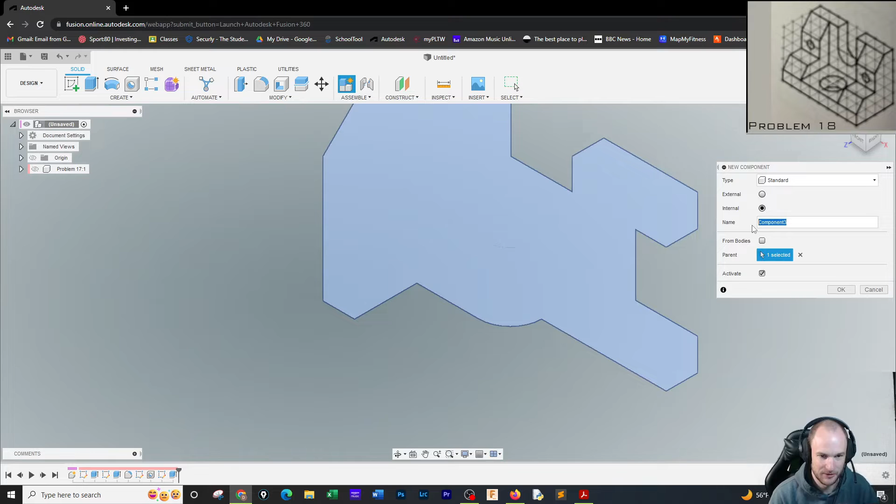Here we go. Number 18, the last of these block problems. I know you're excited because I'm excited too. So, new component, problem 18. And we're going to click up here. I'm going to click the front face. And guess what? I am making a rectangle that is 8 by 5, as I've done for almost all 18 of these problems.

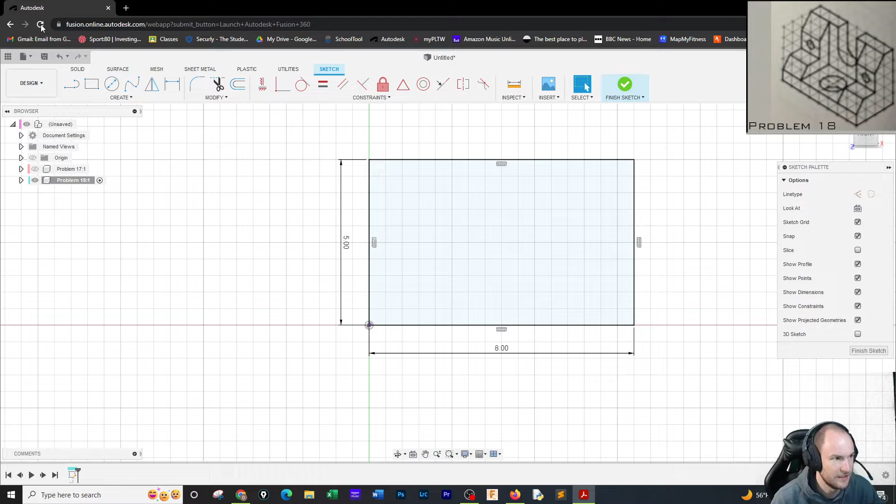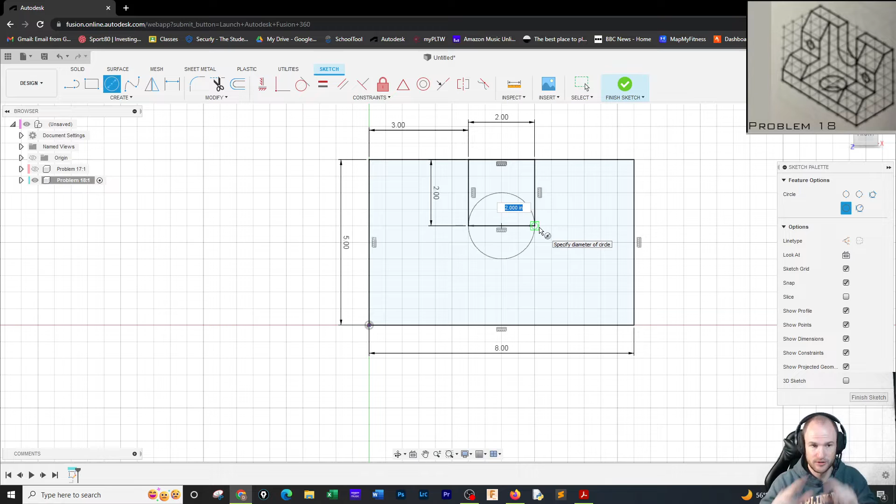I'm just looking over the drawing. Gotta do some kind of box in here that's a 2 by 2 box. So the box is 2 by 2. Those are the dimensions I'm throwing on there. And it's going to be 3 from either side. It is centered, so you could do 3 on the left or 3 on the right. There we go, 3 on the left. And then to get that rounded bit, we're going to draw a circle right off of that center point. You know it's a center because it's got that triangle going. And draw the circle there.

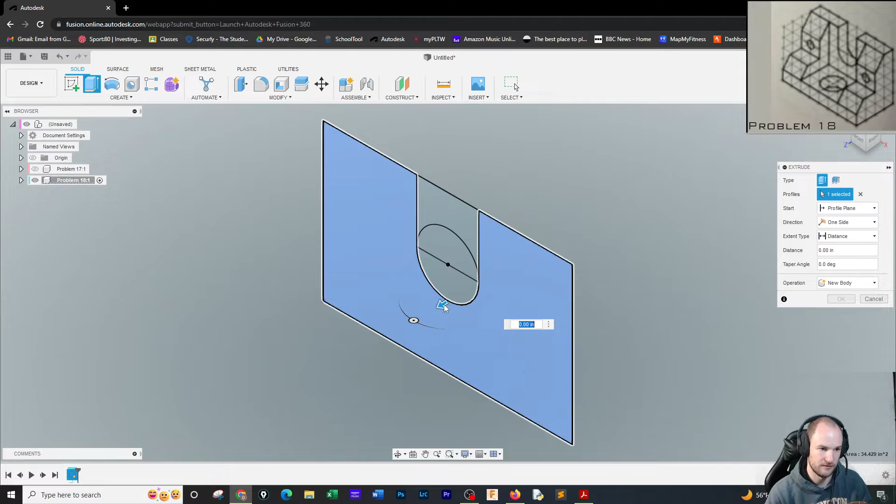And that's great. Can't hit anything else from this view, so I'm going to go to the little house up in the corner, turn that off, and we are going to extrude this back -4. You could extrude it forward -4 too, it's the same either way to me. If I was machining this, that makes a difference, but we're not, so don't have to worry too much about that.

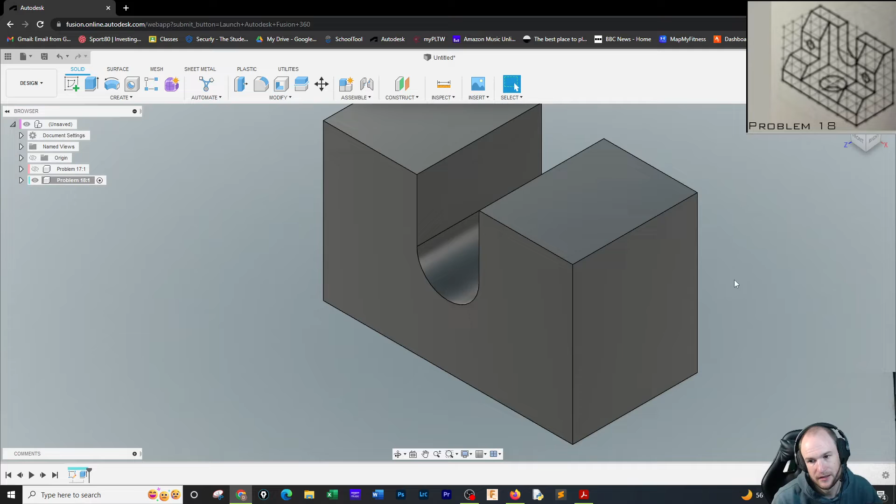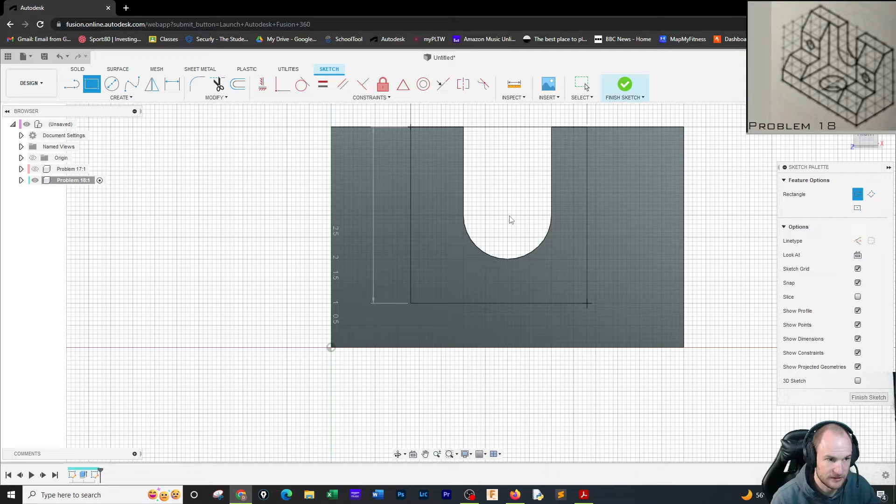All right, now we got a lot of stuff to cut out. We got 2 sets of holes to put in, and then a cutout on the side and the front. So I'm going to do the cutout on the front first, because I can do that with 2 of the holes, try to save myself some steps. So I'm going to draw right here a box, and this box is 4 by 4. So it is a square. As you can see, the dimensions 4 by 4, and it is going to be 2 from either the left or the right side. You can decide yourself.

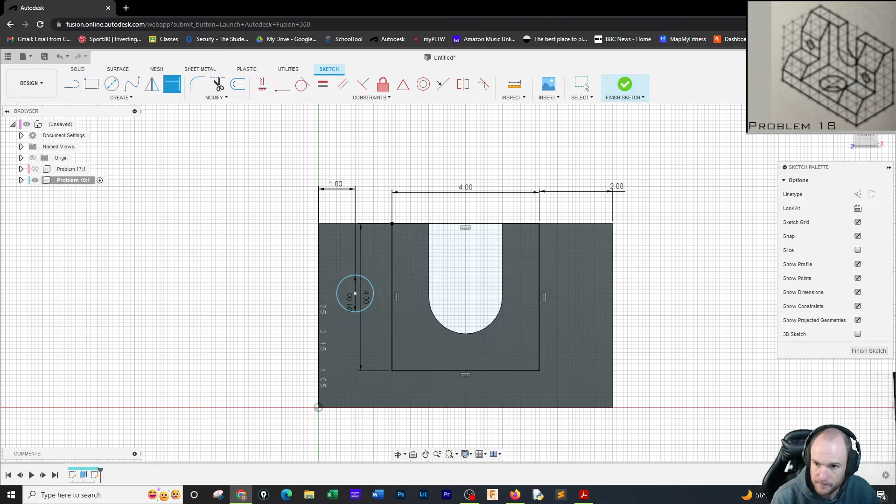And then I need 2 holes. I need a hole on this side. I'm just going to put it there. And these holes look tiny. They got to be 1. Like they are centered, 1 inch in. Looks like they're 1 box. So I'm going to say they're 1. Even that looks big though. And it is 1 inch in. And from the, let's see, 1, 2, 3. Is that right? I believe it is. So 1, 2, 3 from the bottom.

The diagonal cut we're going to have to do is going to be tricky, because it's kind of a field cut. It's not a definite dimension. But these are, so I can actually line this up. Approximately 1 inch hole. Could be a 0.75 hole. I'm having doubts. 3, and then 1 from the side. And I'm going to have to share sketch this later, but I'm not worried about that right now. Just wanted to get them all in there.

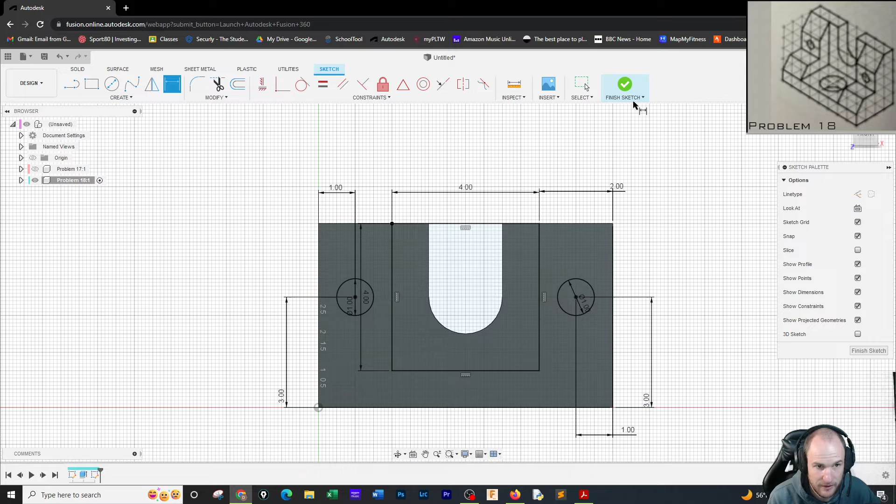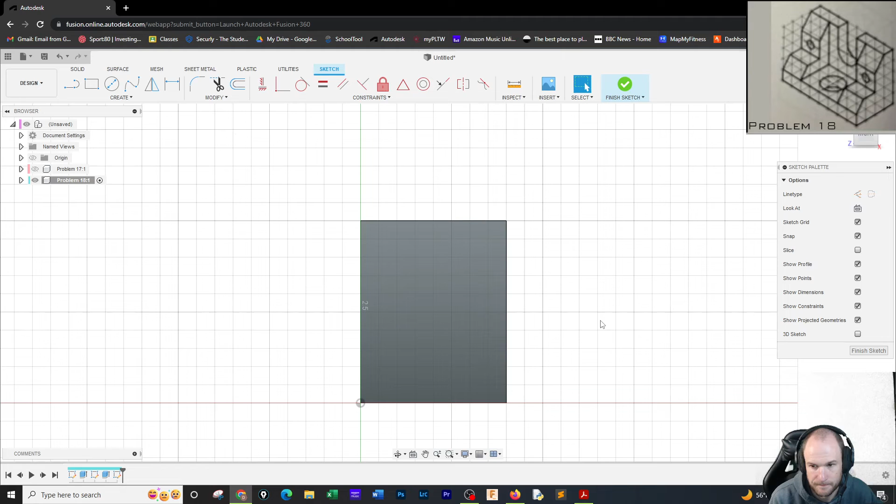And I'm going to do the definite thing first. I'm going to go in here, and this goes in 3. So that goes in -3. That's the definite. That's easy. All right. I'm going to make a sketch on this side face right here. And this is where it's kind of hard, because we got to make some kind of shape that looks like this, and we got to close it off, but we got to get all the dimensions right too.

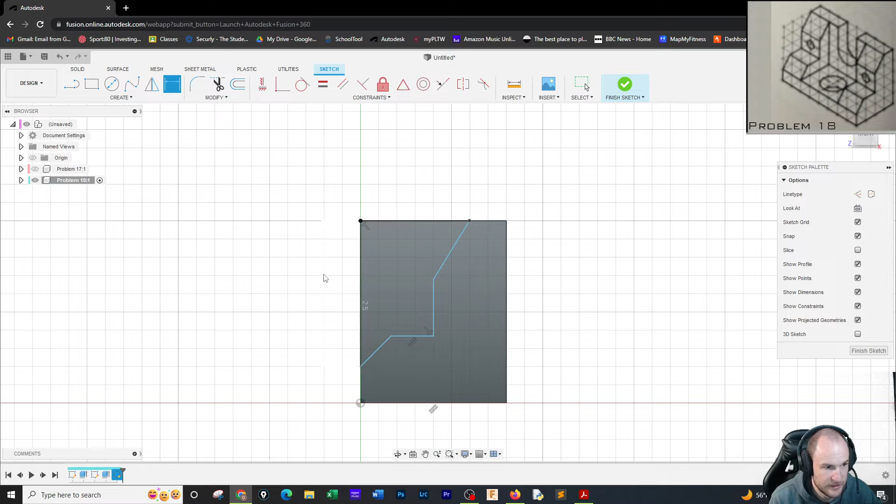Some of the dimensions are easy, like this one's a definite. That's 4. That's definite, rock solid. And this one's going to be 3. Those two dimensions are pretty much rock solid. I know exactly where they are. The problem is there's not a real definitive of what these angles are or how far over these things are. Like from here to here, if I was to dimension this, it's hard to tell. I'm gonna skip that because I've got some definites I'm looking at.

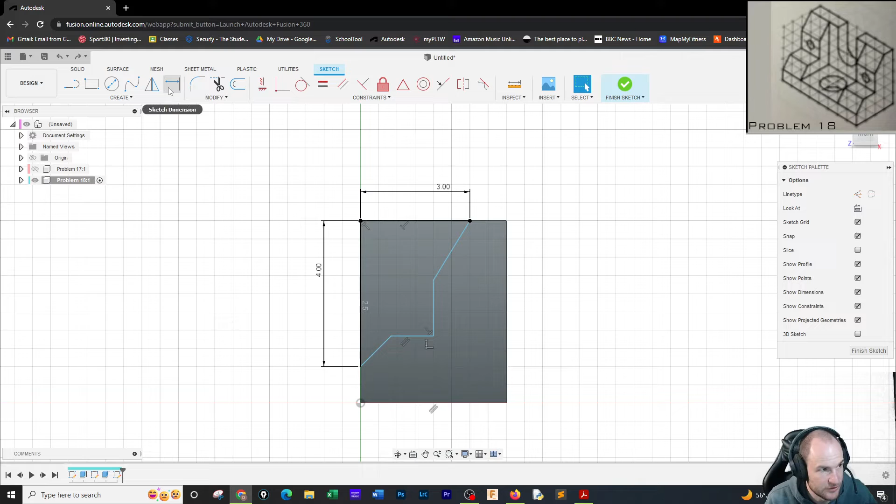This spot is definitely at 2. So like this is a definite. This is a 2. From there's 2. So that's a definite. That's good. And then I guess we're gonna have to go off of that. This goes up just shy of 2. It's not quite a 2, it's just shy of 2. So I'm gonna say this goes up 1.75.

And then this one right here is just over 1. So I'm going to call this one 1.25. And that's the closest we can kind of get with a drawing like this. It's got to be some level of estimation. But we're gonna go with that. So take a second, get those dimensions in, and then I'll hit finish sketch.

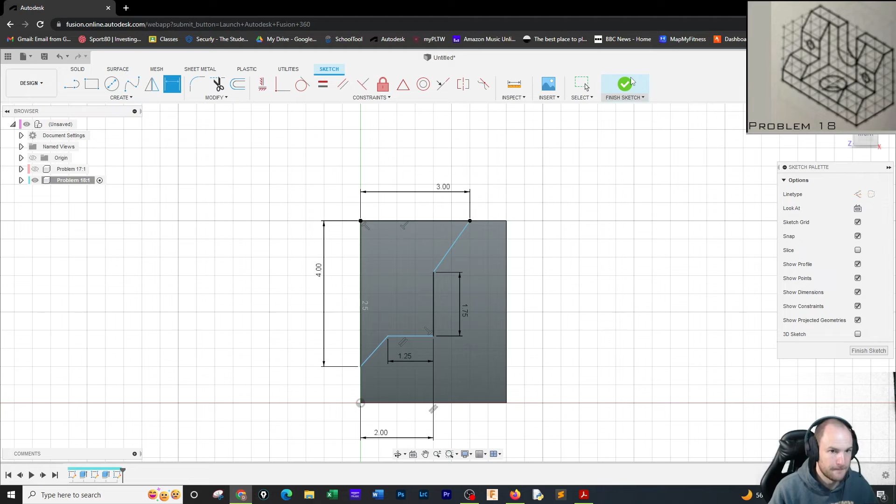I'm going to extrude this through. If I finish sketch, I'm going to extrude it through. It's going to give me kind of a look at it to see how it looks. It looks pretty good. If I go back over here and I open up my second sketch, this one, I can now take these 2 holes, cut them through and see if this looks good. I'm just going to grab those 2 holes and bring them through.

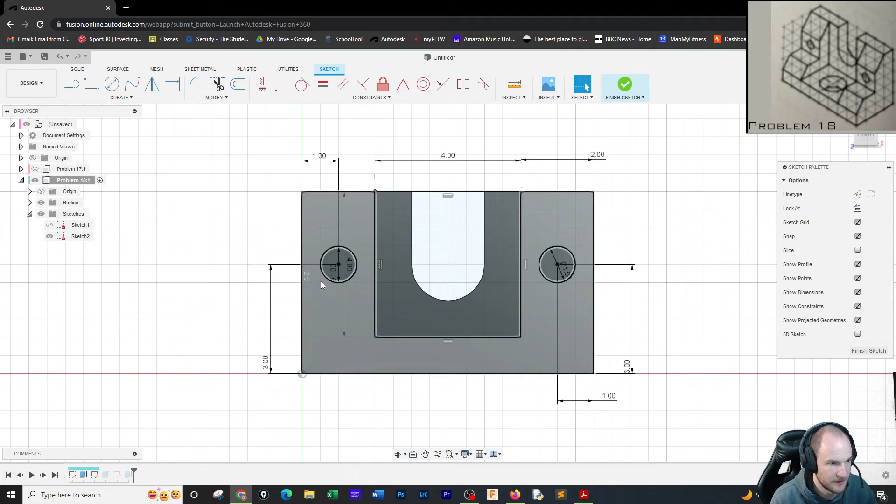And those holes, they look too big. So I'm going to open that sketch back up. And I'm going to change these holes. It's hard to tell, but I'm going to change them to 0.75. And I think that's going to be a more appropriate size. We're going to hit finish sketch. And now I'm going to extrude them through and see how this compares. And that looks much more like it does in the drawing. So I changed it to 0.75.

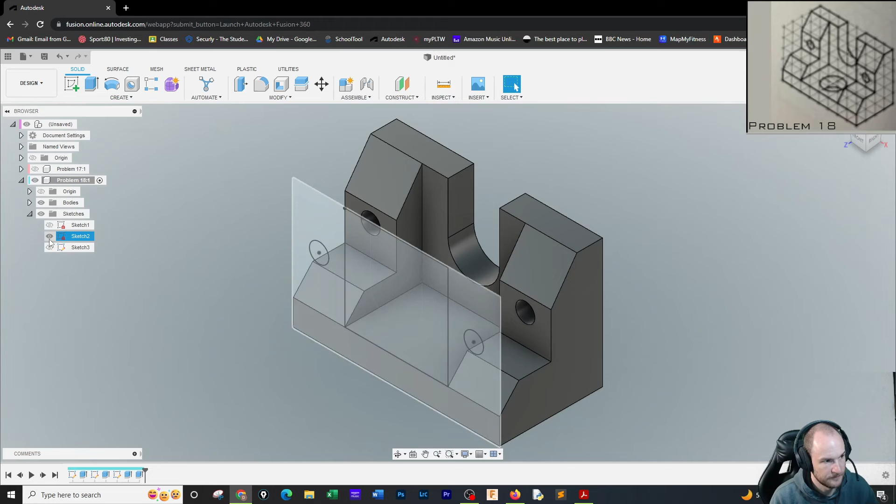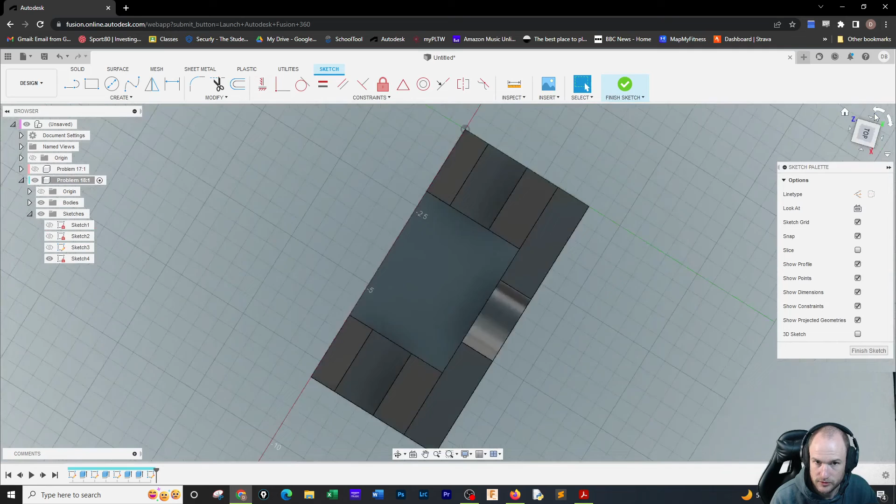I'm going to turn the sketch off. That's looking pretty correct now. I'd say this is all good. And then I just got to put a hole in the top. We're going to spin it. 1, 2. Turn this on. And looking at the drawing, we can use a point or a circle. I'm just going to use a circle. The circle looks like it is 2 in diameter. So I'll make the diameter of the circle 2.

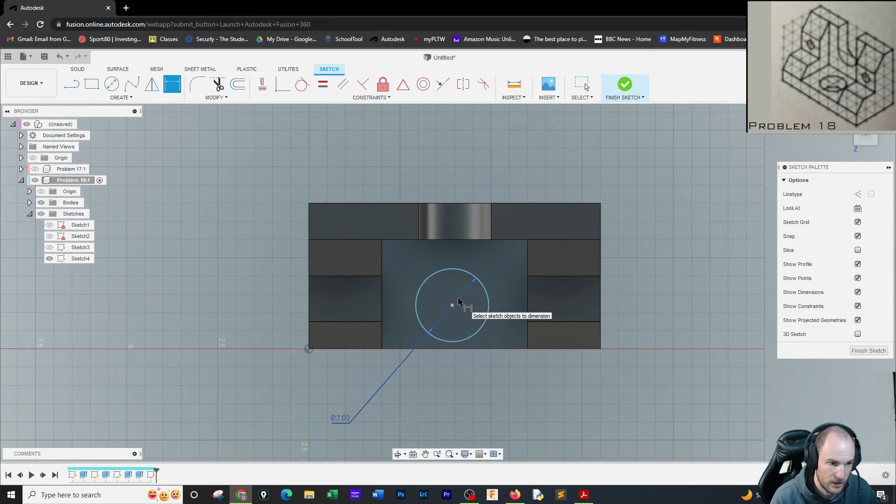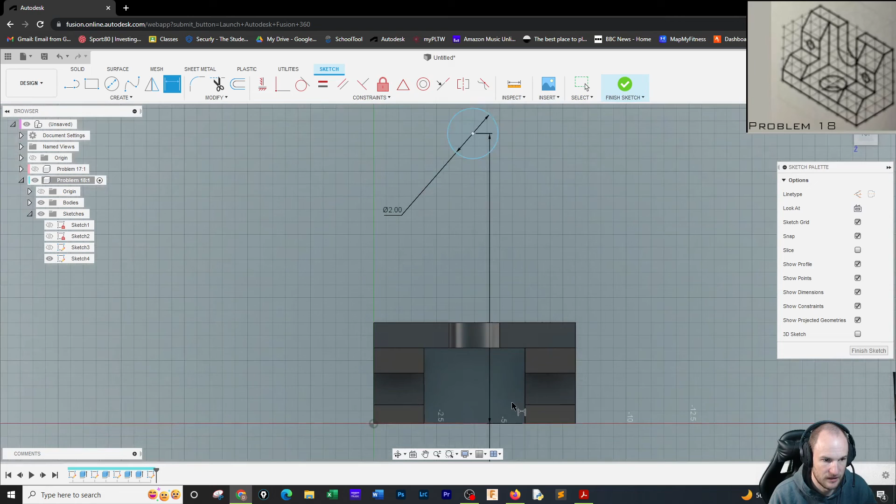And then it looks like it is centered 2. Oh, well, maybe not. Centered 1? It can't be 1. Oh, it's in the center of that. I see. So it's between those 2. So that means it's 1.5. I just totally typed 11.5, and that's quite a large dimension. It should be 1.5. All right. That looks good. And then it is centered in the object, so that is 4.

So we have, for the side dimension, 1.5, and then 4, diameter of the circle is 2. Hit finish sketch, come up to the top, go right here, and we're going to go down, and we're going to click OK. And ta-da, we're all done with problem 18. And that's all of this first batch of problems. And after that, we're on to the more individualized ones that are based off of dimensions.